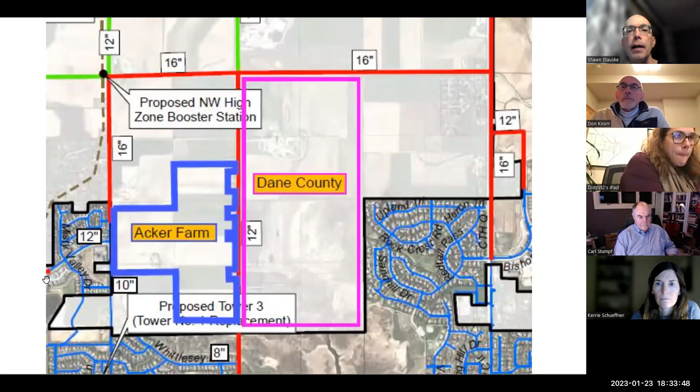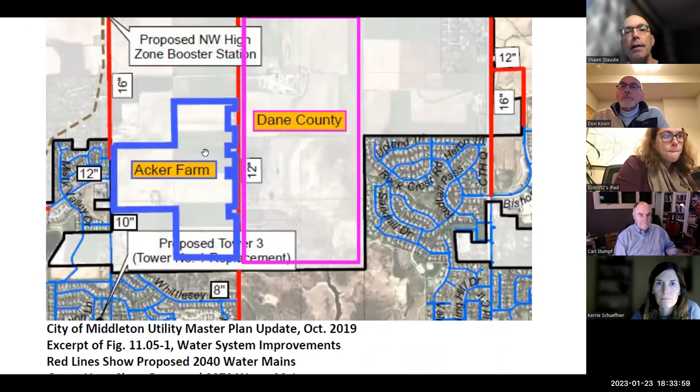So all the recommendations in the study, let me spin down and highlight it in the diagram. This is virtually the same diagram we had last time of the water main. This would be a 12-inch pipe that comes up along, not right along the roadway, but internal to the development and then back out to the roadway. So that's consistent with the utility master plan.

And then for the sanitary sewer, I realized there were a lot of numbers, that's why I just made this graphic instead. There's sort of a drainage break, if you will - southeast of this line that I'm tracing with my hand would drain down to the pumping station and go into the Pheasant Branch interceptor. Things north and west of this line would drain through Misty Valley and get into the Pheasant Branch interceptor that way. This little bit of an elbow of existing pipe is the one that has somewhat limited capacity.

So it's collecting sort of the north part of Misty Valley. It'll be collecting the lion's share of Acker Farm or Redtail Ridge, whatever it ends up getting called, and then a little bit of this future area to the north up toward Balzer Road. But to collect the rest of that, the pipe that'll be built through Acker Farm has capacity. It's just this piece of existing pipe that was laid flatter than would have capacity for that, so that would have to either be relayed or upsized.

One other thing the developer's looking into, and it's really a concept at this point, is could the pump station down here be eliminated if they could find a gravity route that goes right into the Pheasant Branch interceptor? The hard part is there's a bit of a creek that goes west to east right through here, and they have to get under that. It may not be possible to get under that and still have cover over the top of the pipe. So they're open to looking at it. I'd love for it to work. I'm not very hopeful.

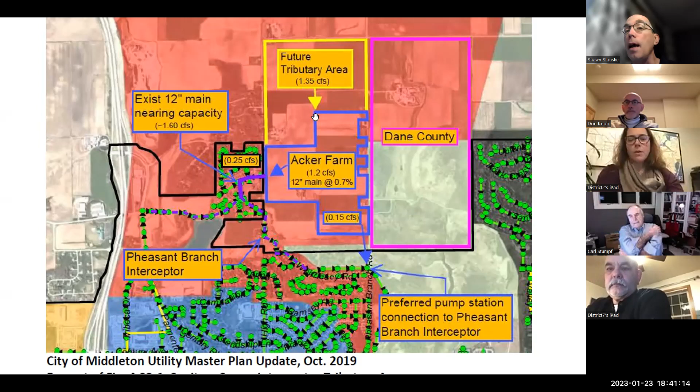All right, one last question - is it better to do that now before Acker goes in, or does it matter? Well, the harder part is, Acker has capacity in the existing. So there's not any great reason to make them do this now - we just need to make sure Acker doesn't do something that would screw up a future connection. That's why we wanted to make sure this is the right size at the right slope, so we don't have 1,000 feet of main that has to get relayed.

Say we're looking for a motion to recommend approval of this. We have a motion and a second already, Carl. We just need to finish discussion, and if the discussion is finished we can take a vote, but is the discussion finished, I guess that's my question. Excuse me, my internet connection's acting up tonight so I'm a little slow. We saw that, Carl. All right, with no further discussion, motion has been made and seconded.

All in favor of the motion, which is to approve this plan, please say aye. Aye. Opposed? Motion carries. Item number 3, plat plan.

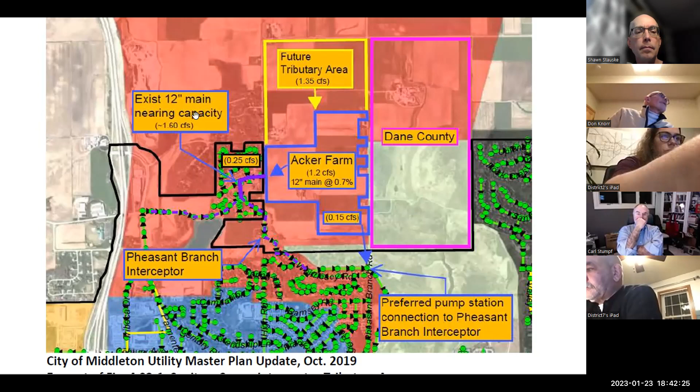So number 3 is the preliminary plat, and we've been looking at a couple iterations of that. Oftentimes these things just go to the Plan Commission. Since we have some roadways the committee's already looked at previously, and some of these utility issues, I had just gone through it, and granted there are quite a few markups on it, but the recommendation in a grand sense is for conditional referral to the Plan Commission, with some conditions.

So let me just head over to the plat. I put a bunch of comment boxes in. I don't think many of them are terribly substantive, other than in these multifamily lots. The center one is right now planned without frontage, so that's something we're going to need to talk with them

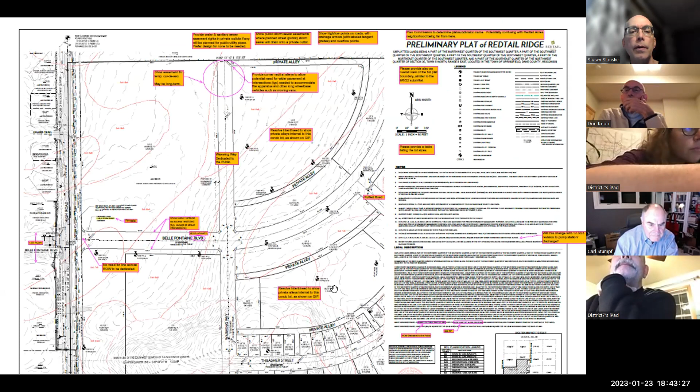sooner than later. And this road that's stubbed out for a potential connection into lands to the north for future development, we're asking, as is typical, for an easement for a temporary cul-de-sac. The rest of it, I think, is relatively insubstantial.

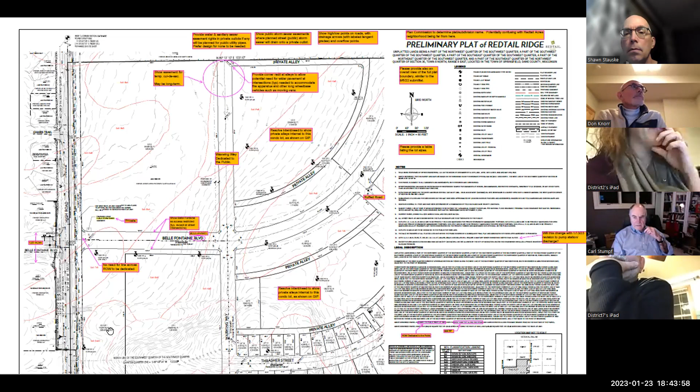One of the things you might want to do is have them fix the key plan. Every one of these drawings shows the same area on the key plan, which is not true.

Is it this plan? Are you saying that it's inaccurate on each plan? No, it's the same, because it shows the same area on each plan. If you look at each one of these drawings, it shows the same area on the key plan, which is not true. Oh, I see what you're talking about. Okay, I didn't even really look at that. I just was using that as my own reference. I was trying to follow this. It was impossible.

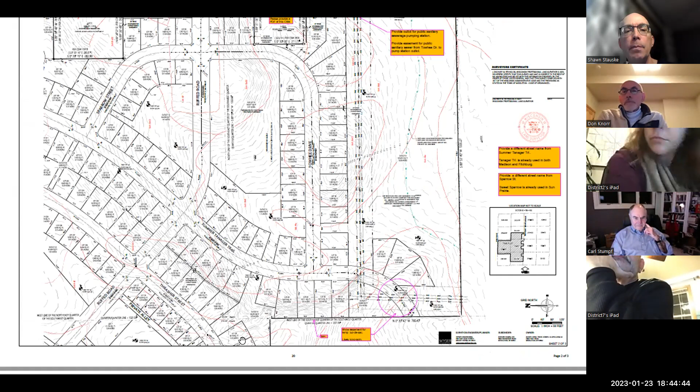Yeah, the part I found a little more frustrating is there are no match lines. So parts are duplicated, but parts just have gaps. Yeah, but I'll make a note of that. You have to add match lines in here too, Shawn? That would be good.

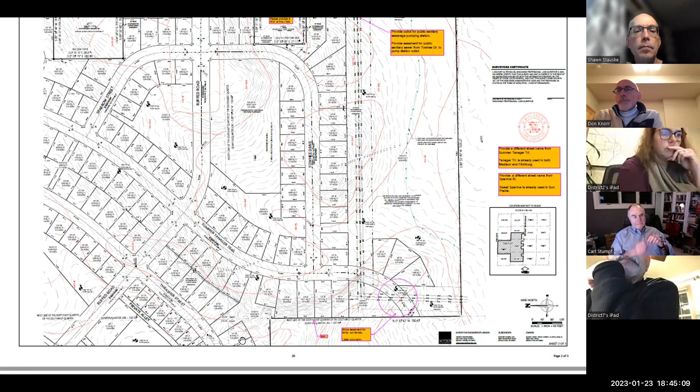Okay. So you need a motion from us to approve, to send to Plan Commission with these comments, or approve with these comments to send to Plan Commission. Oops, every now and then I get to resize things.

So I drafted, and I'm certainly open to additions or changes, but just drafted a recommendation to get it back to the Plan Commission for conditional approval with at least these conditions. You or they may know of more.

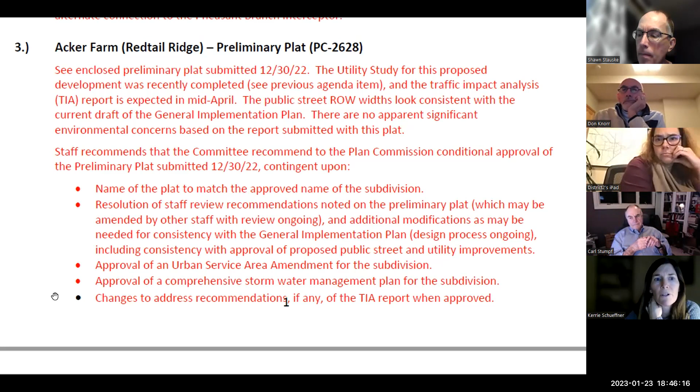All right, do we have a motion that states such? I guess the motion would be to include these items in our motion to approve, correct? Well, ours is to recommend it to the Plan Commission for their conditional approval. They're the ultimate approval, okay. I'll go ahead and make that motion that we recommend to the Plan Commission conditional approval of the preliminary plat contingent upon the items listed here in the agenda or in the memo, either way, I guess.

Okay, any corrections or additions to those? We have a motion from Kerrie. We need a second. This is Kendra, I'll second. Any further discussion? Hearing none, all in favor signify by saying aye. Aye. Aye. All opposed? Motion carries.

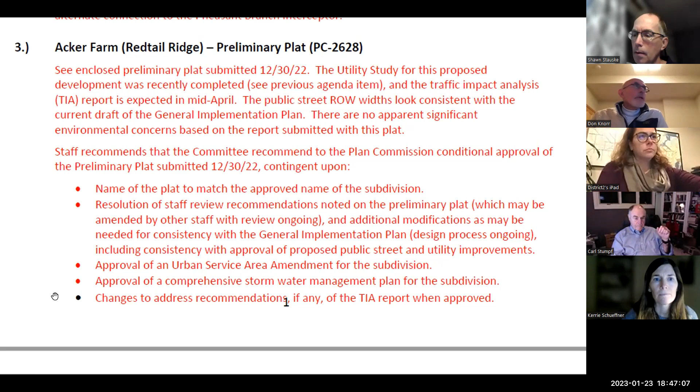There, finally. So the Bruce Company redevelopment has a couple things going on. One, and I've split it into two pieces here, ideally, just, I hope it's more straightforward this way. One is for the TIA addendum, which we had looked at last time but did not take action on. And the other is for discussion of site access apart from that analysis.

Okay, Shawn, if we go ahead and approve the TIA addendum, and then there are some changes, do we have to have a new TIA, or I guess how does that work? Like, you know, agenda number 5, if there are some changes, how does that impact things?

Right, well, so that's a really good question. A TIA is something we need because of the nature of redevelopment. We want to understand where traffic's going, where conflict points are, looking far into the future. It has recommendations for the city's guidance. The city can take action or reach conclusions different than the TIA, but this is just a snapshot with technical analysis of input. So they looked at 4 different driveway connections with varying degrees of mobility and made some recommendations. If the committee and or Plan Commission and or Common Council wants to go beyond that or look at something different and reach a conclusion or approval for site development different than the TIA would recommend, they certainly can. This is just providing technical analysis and input on some fixed conditions.

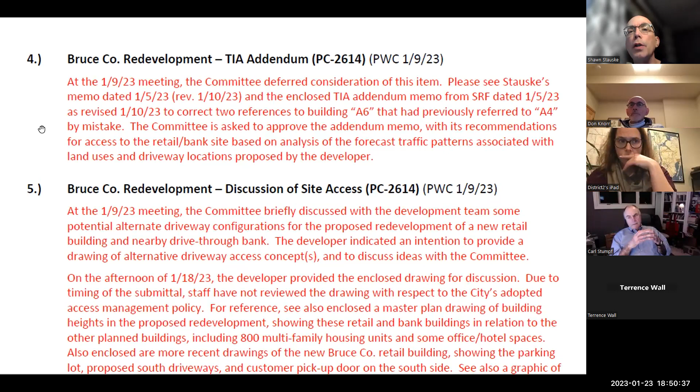Does the motion include the memorandum? Well, the motion is the memorandum, basically. Okay, so we already previously approved the full-blown TIA. Jake Buns, on behalf of the developer, requested that we study different access configurations just for the retail site, not the overall development, but just the retail site.

Okay, so it does include the memorandum, the SRF memorandum of whatever that date is. Yes, and that memorandum is fixed just to those 4 driveways. And if the city comes up with something else different, it doesn't include that.

My thoughts behind making this motion, setting legal aside, are that my understanding is that we go ahead and approve the memorandum as is, given the design as it was. Then in agenda number 5, we could discuss other potential options, but those weren't on the table when the TIA addendum memo was analyzing those options. So it was analyzing those 4 driveway options.

Right. Okay. Again, we have a motion, but no second at this point, on item number 4. Correct, so then the motion would die for lack of second. Correct, unless we get a second here in the next minute or two.

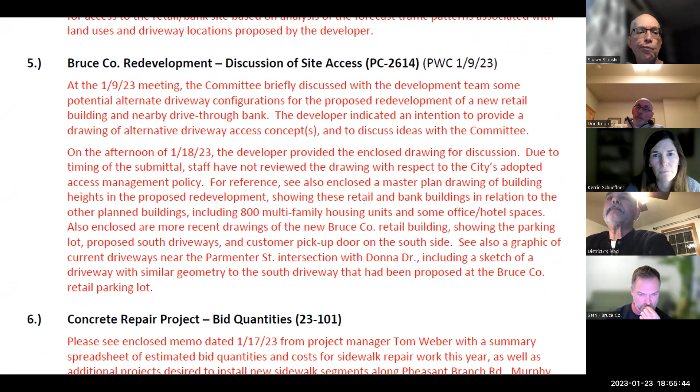So Shawn, explain to us, I looked at the plans and saw them, and it looks like we would have to accept a variance to the city's design concepts. Is that correct?

Well, the city has an access management policy that we've adopted, but it's policy, right? It's intended to give everybody the same guidance for the same situations about access. And that's a lot of what SRF has been looking at, and it's frankly based on practical experience with things. So they made recommendations that are just technical, saying we would recommend against this.

I know the committee looked last time and the developer provided a drawing with this southerly driveway being more of an S-curve than just coming straight out. Previously it was in the mid 50-foot range from Parmenter Street curb over to the driveway, and then a little further from this next driveway. Now it's dimensioned well to the center, so 80 feet from the edge of driveway to the stop bar, when it had been much closer than that. That puts this now in the ballpark of 60 or 65 feet away to the next driveway.

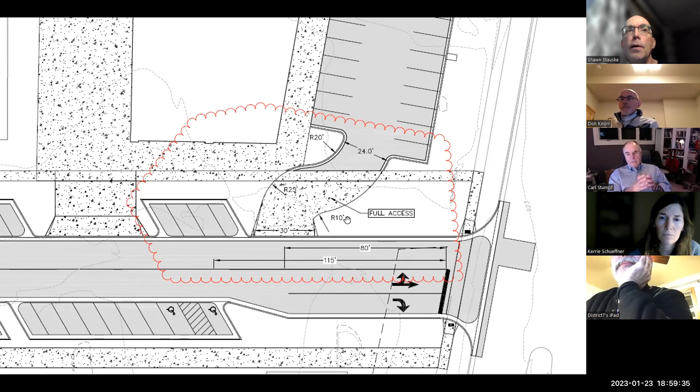Well, I think the city, I don't know where council's definition of policy comes from, Scott. That's my question. I'm open to that different interpretation. I just think in broad brush, it's different than an ordinance. It's not something that the council specifically has to override. They've adopted something and given it to staff and said, follow this, which is what we intend to do.

But the council can reach a different conclusion on a site-by-site basis for different reasoning, and that's okay with me as a staff perspective. I just think, from what I'm looking at, plan or policy aside, that the desirable clearance from the intersection isn't going to be achieved here. I think there's a lot of other stuff going on.

If we're going to look at angle parking, and then we're going to look at a truck dock, and we're going to look at folks backing into a pickup area, I mean conceivably somebody would leave this parking lot and drive 60 feet and then back up. And there's, from my perspective, a lot going on.

Yeah, I agree with that, Shawn. It does seem like with the parking, ideally that driveway would be set back further. But could you put your cursor where the policy says, like there, right? Right, okay.

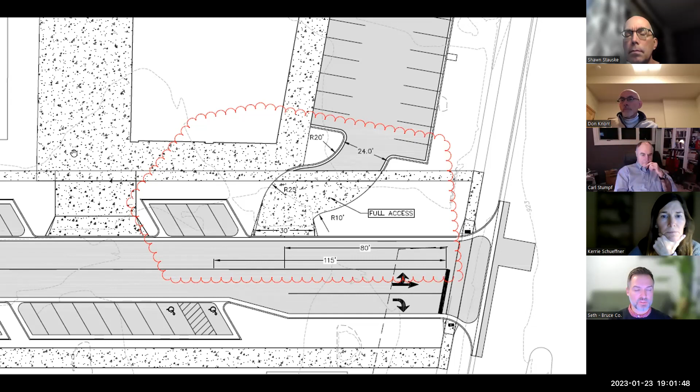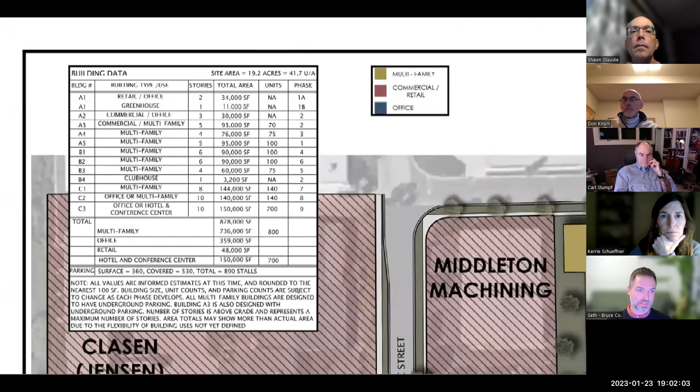Keep in mind Laura Lane as a major corridor of the development and the direction of most traffic to get to the Beltline, to get in and out. So the only traffic that most likely would be traveling on this road from the development would be going to downtown Middleton or downtown Madison. Most of it will be going Laura and out.

And also keep in mind, these two driveways are existing, though slightly different. Have we opened it up for public comment yet? I just wanted to, before we get off track. It's up to the chair.

So Shawn, one other question here. Let's say we approve it - we essentially are approving a variance then to our policy. If we do not approve it, the developer still has the opportunity to go back to Plan Commission and Council for approval, is that correct? To override us? Or at least conceivably they could provide different input to the council. Yeah, all right.

I agree with you, Shawn, with the apartment buildings. I'm trying to understand the flow, because we want to make sure we're designing something where people can easily get in and out. I understand where the Bruce Company is coming from, but we have to look at the bigger, larger picture of the apartment buildings in the back too. So this is a good view, thank you for showing this.

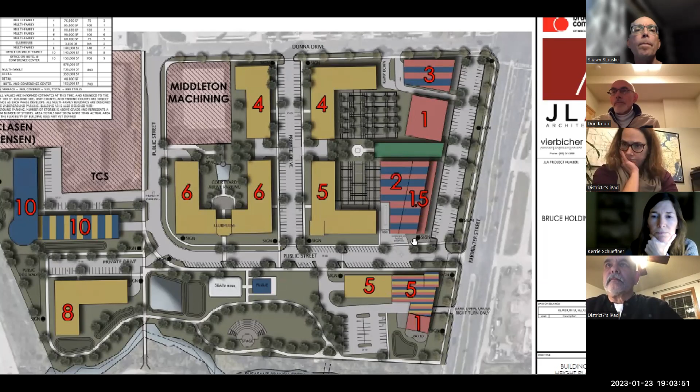Seth, do you want to answer that? Those parking stalls are not only for the city, but also additional for the park across the street, and there's an entrance way to our office and design studio, which doesn't get much traffic - very minimal, people dropping off a check or coming up for an appointment for landscape design. Majority of the time we're going to the homeowners, but it is an entrance way upstairs for customers. The rest would be parking for employees, but it's the rarity of those customers that would park there.

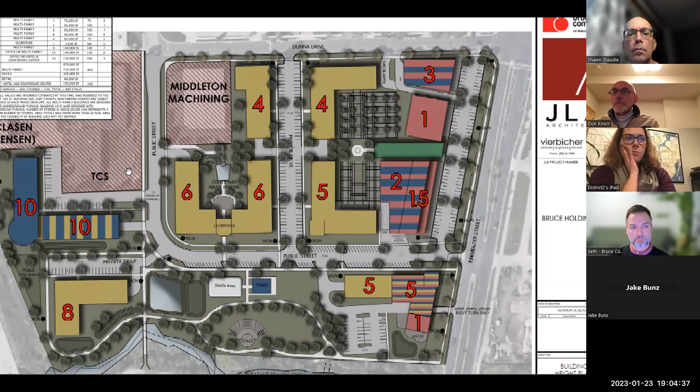Okay, because the elevation on page 5 doesn't really show an entrance on that side. So I was wondering, maybe on the stone part of the building. Because it seems to me those parking spots seem sort of superfluous - I'm not a parking person, but it seems to me you could gain space from those small ones accessed on the street.

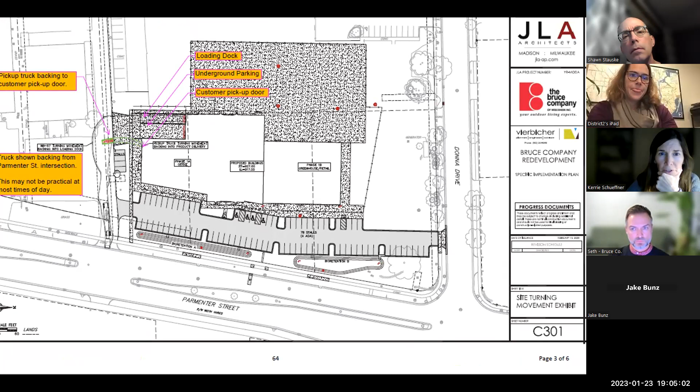Yeah, okay. Could the driveway move a little bit further back if those weren't there? I don't know, that's a pretty tight S curve already, as shown. That was my other thought too. I also think drivers may tend to try to straighten that out, but then they're going to find themselves heading into opposing traffic. Yeah.

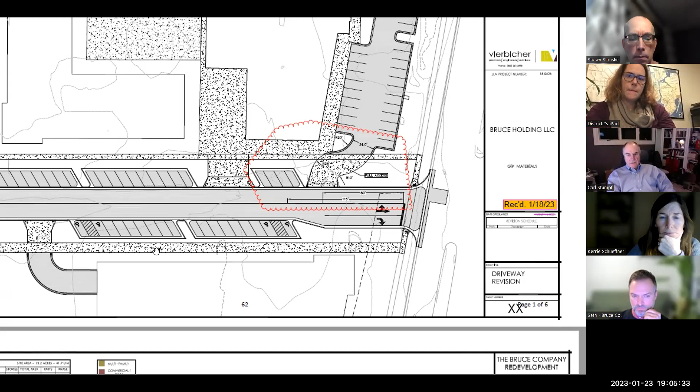How is the semi going to back into building number 2? Is that shown on the previous drawing you had up, Sharon John? I don't remember which is building 2 - go back. But Building 2 is right there, it's the South Bruce Company commercial building. Is it this pickup area?

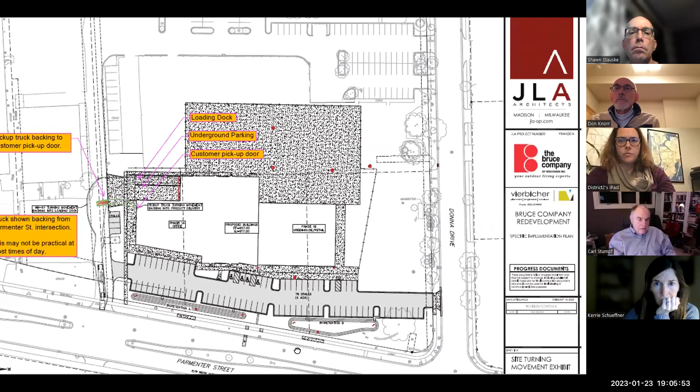No, not this one, the one you just had up before this. It's number 63 of 86. Okay, you see number 2 there? We're number 1.5, adjacent to number 2. Is that notch a semi that backs up in there? Right, so that would be the truck dock. This is number 2 and this is 1.5, but it's not coming through very well. Okay well, whatever - is that a semi that backs into there? Let me zoom in a bit.

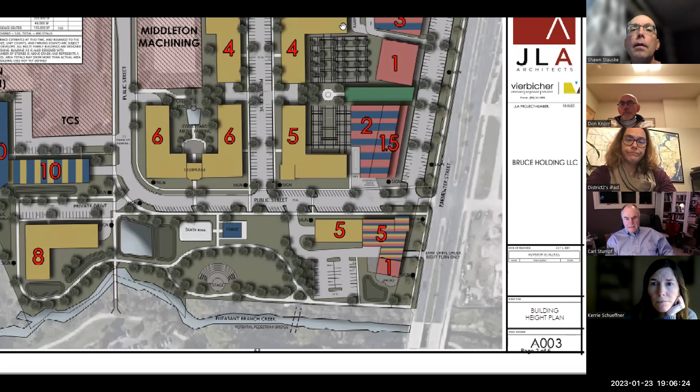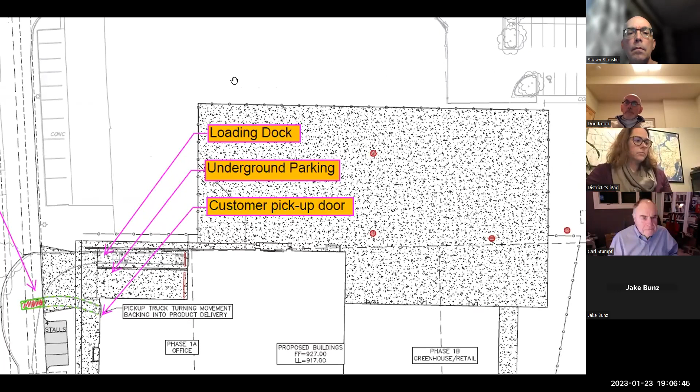I can comment on that, Shawn. So yes, it is a loading dock, and in talking with Seth, they need that just for inventory for their garden district. Vierbicher has done a turning radius analysis on whether the truck is narrow enough to back into the loading dock.

But Seth, you could talk to how many times you get a truck in the loading dock - it's a necessary part of your business, but I don't think it happens all too often. It's not a giant warehouse getting 5, 6, 10, 20 deliveries of 18-wheelers a day. It looks like the same problem that Bagels Forever has with John Fladd's thing on University, right off of University Avenue, frankly.

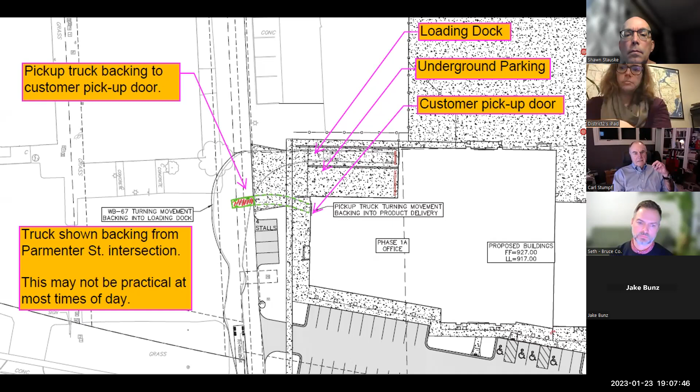I don't know, the density of this site is just way too much, frankly. I think that to come in with a development plan that doesn't meet the standards of the city is not acceptable - certainly not acceptable to me.

Carl, just so you can understand a little more of our process. Way back when we started working on the general development plan with the city, got it approved, and got the SIP for this building approved, the layout of this building, the driveways, the parking lot, and the development site as a whole was creating an urban environment where we kept a sea of parking off of this site. We minimized the parking and left the driveways where they've been for the Bruce Company for 50 plus years. So that's some history on how it was designed and why, but that doesn't meet the needs of the city because the standards from 50 years ago are different from when this was originally built.

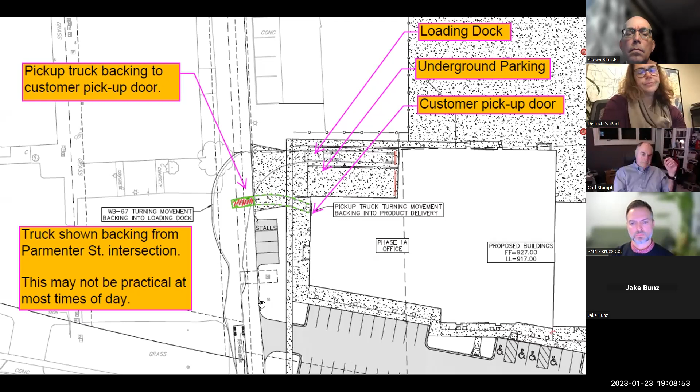Yeah, and that's exactly why we're proposing this 80-foot distance, if Shawn wants to show that, away from that Parmenter Street stop bar. Because we can make it work within this site. I don't think it's ideal for the Bruce Company, but it's something our engineers took a look at and they can make that curve work. At the least, if you guys were to approve a variance that we could have our driveway 80 feet away from the stop bar, we could go back and take another look, see if we can make it function even better. I think this is a starting point for us, but we're really looking for this variance.

So obviously we can't make that turn work at 115 feet like the city's access management policy, but as shown, we can make it work at 80. So if we get some direction from you guys that you're okay with us pursuing this 80-foot distance from the stop bar, we'll go back, rework it, and try our best to make it fit the site as best we can.

Well, so that's one issue. And to wrap up, I, for one, don't believe that we necessarily have the authority to provide an exception to a standard that the council has approved, frankly.

Well, last meeting that was the recommendation, that there might be a compromise to the alternative, and that's why we went back and actually adjusted this accordingly. Because my other alternative—well, I remember the discussion at the last meeting was to get it within the standards, and you maybe have to cut the end of the building off to do that. You're telling me that we didn't discuss last week any type of compromise from the 115?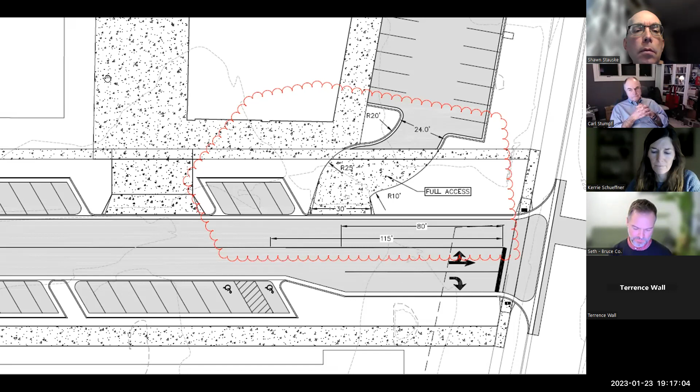Let me, I always have some trouble with that, but let me try. Yeah, I know, me too. Just click it to that. Turn it into a free for all. Maybe. Hold on one second, I'm trying to get this to work.

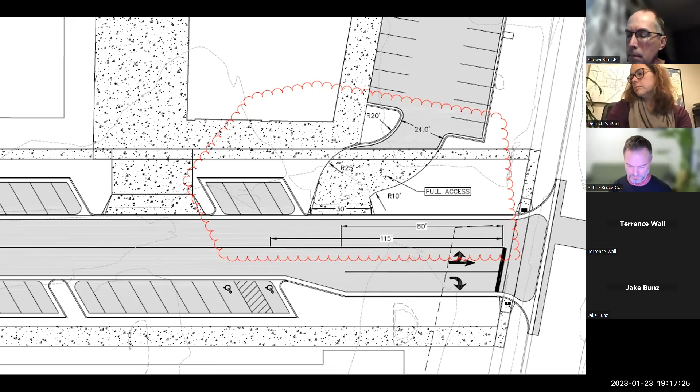You guys see this? Yep. So it's kind of messy. I just drew this up and I've not gotten any feedback from Seth on it, so just caution there.

What if the driveway was one way in, going in, so there's nothing coming out, and the outbound traffic turned to the west? There was a parallel lane to the pickup window for customers, so they parallel park there. And then that's one way going outbound, much further away from the intersection. The wide driveway you currently see is going to be reduced because we're going to get rid of the ramp to the underground parking.

The underground parking—so then you'd have, I think, the problem solved. We would get rid of those 4 parking spaces right on the street there. That'd be grass. I don't know, it's just a thought.

So we would be past the 115 then in your little diagram. You'd get rid of those four spots, yes, provided the past engineer could make this work. Yes. And then one way in and one way out, and you'd come out farther down past the 115. Okay, I see what you're saying.

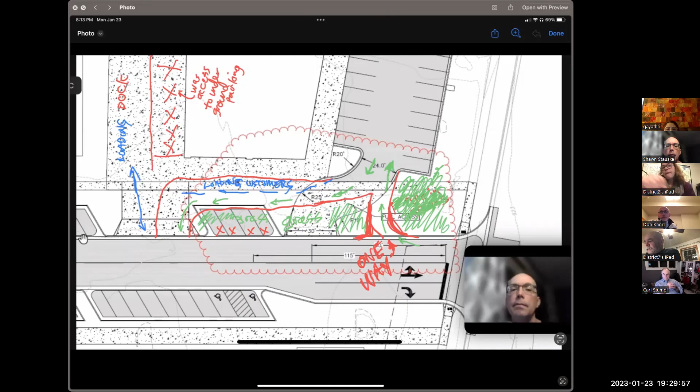No, we passed a motion. Yeah, never mind.

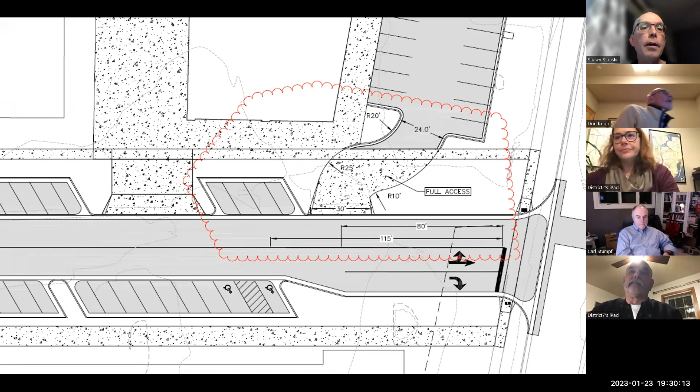All right, let's move on. So we were up to the concrete repair project. Let me just get things situated here a bit for you again.

So this comes down to creating a bid package, and Tom Weber, who runs that program for us, has preliminarily identified work within our typical 1/8 of the city area. In the meantime, there's been some interest in infill sidewalk, partly along Murphy Drive, south of Costco, out near Eagle, where there's going to be a new bus stop come June. And then a separate infill of sidewalk up along Forsythia Drive near Kiva Sports, which is planning to build sidewalk along their frontage, but it won't be connected to the rest of Forsythia, but for filling in some other sidewalk.

Those would be assessable, but we'd still have to front some money from someplace, and we haven't identified a funding source for that yet. But just to get things rolling, Tom was thinking we could bid those as alternate work groups and then work on identifying funding, or look at the pricing and see if the council supports that work at those prices, getting that done too right away. So we don't want to try to bid it just as standalone work right now because we don't have any way to pay for it.

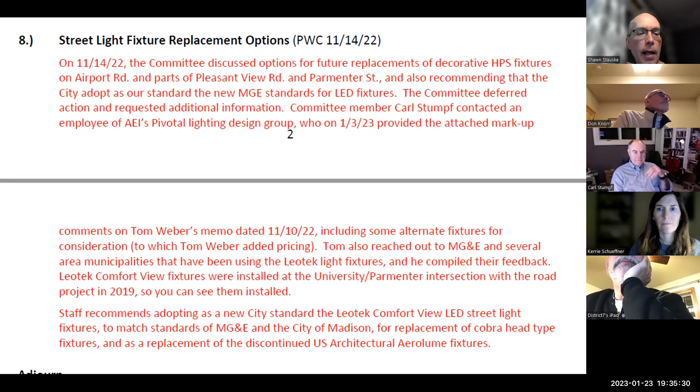Yeah, Carl got us a bunch of information from somebody that he knows, and I don't want to get that somebody in trouble by broadcasting it on the internet, but they gave us some good ideas, and that was included in the packet. Tom Weber did virtually all the follow-up because my time is just spoken for, unfortunately.

But, you know, I think the one concern is maybe the fixture that MG&E and Madison have standardized is something on the lower end, certainly in price, and the fear was maybe in quality as well. We don't have a long track record of the folks we got input from. I don't think any of them have a long track record because this is just kind of all new stuff.

Folks we did hear from seemed really satisfied with it. They said it's easy to work on. It adapts to house side light cutoff shields really well. It's obviously, when it's standard, it's a little easier to get.

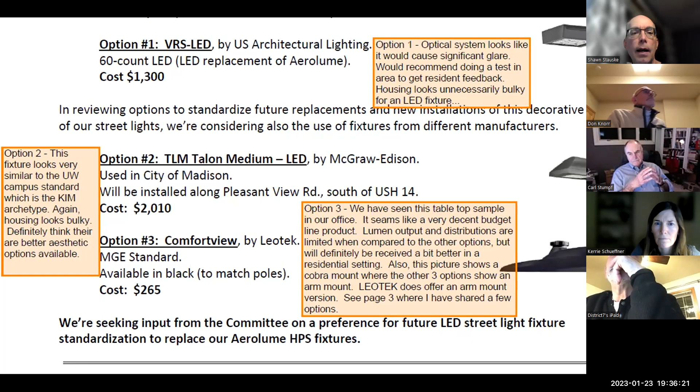I didn't realize until I was walking by that University and Parmenter already has had these things for several years, because I just don't spend enough time looking at light bulbs. But I checked with Tom, and he said there's more than just one of them. Yeah, I think we did that whole intersection at the same time.

So, I think the recommendation was this one with the Cobra mount. And was there a picture of that further down?

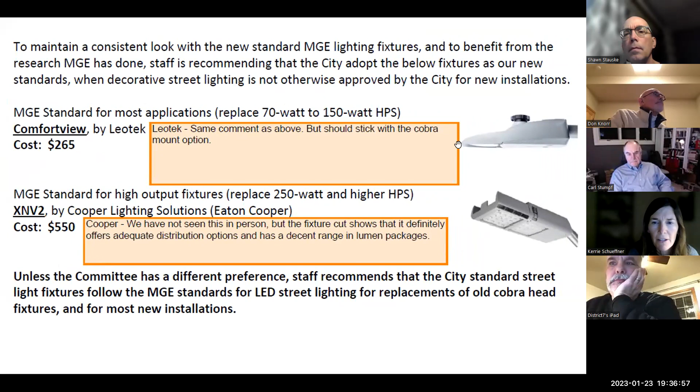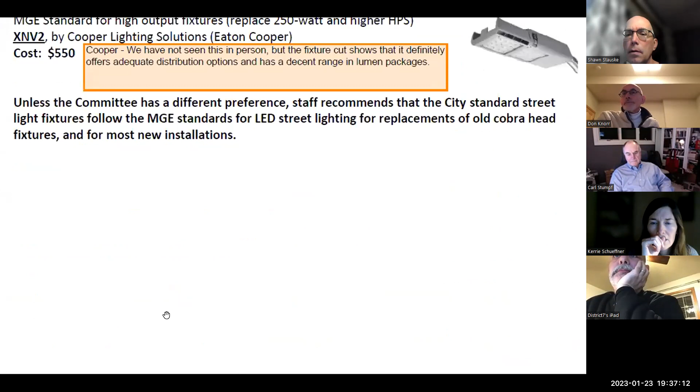There's a Cobra up higher on page 2. Yeah, 2 of 3. But that's this one, not that one. There was an actual Cobra, the type with the light. Oh, this - that's what they used to look like.

Yeah, those are the ugliest things in the world for a modern city. Do you know how many phone calls I've gotten about how ugly our streetlights are? Probably none, but yeah. People tell me if they're working or not working.

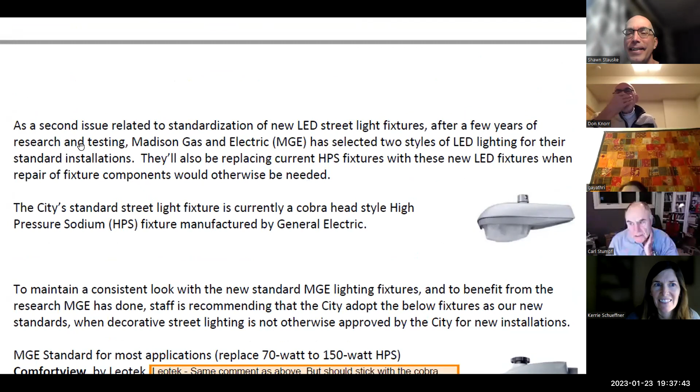Yeah, so - oh sorry Carl, go back to page 84 of 86. Okay.

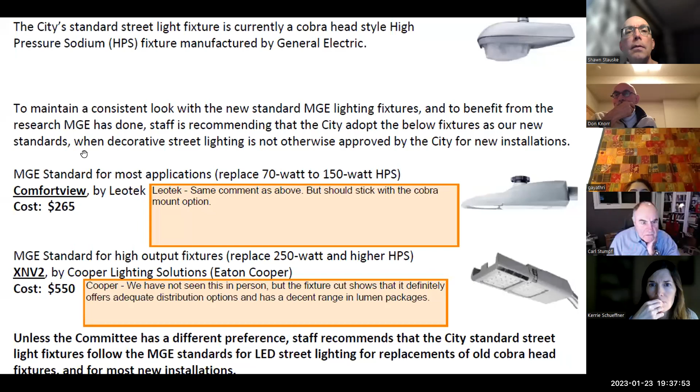I think the Cobra mount is a close coupled mount versus an arm mount. I'm fairly sure that's what it is. I myself wasn't certain, but normally we're just trying to replace these things, so whatever the mount is, that's what we want to match.

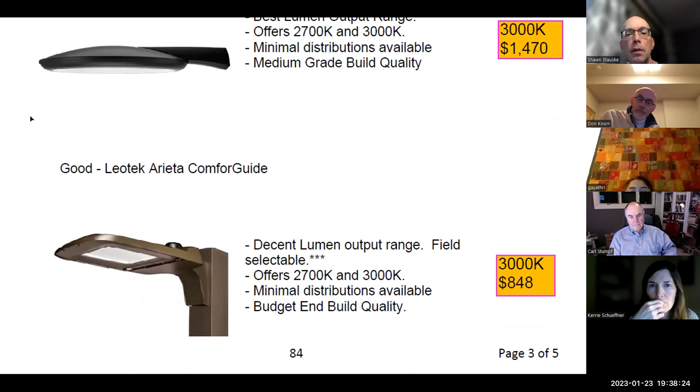Yeah, most of our fixtures that I drive around the city are arm mounted. There's a big long arm on them. They're not close coupled like this. Right, most of them.

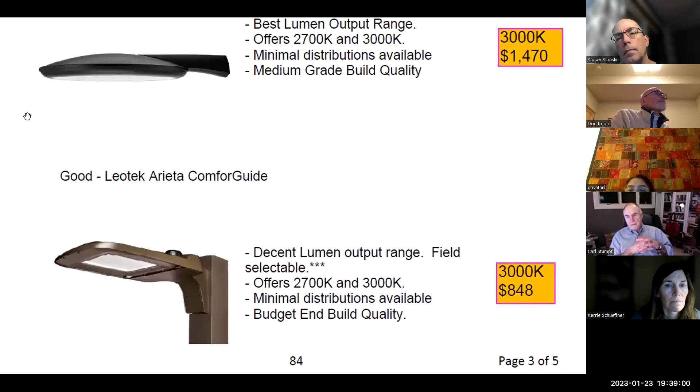The concern I had with that $265 option was the ability to get it down into a color range that's probably more acceptable. I don't know, but that Comfortview fixture will come in three different light sources. You can get a 4,000 Kelvin, a 3,000 Kelvin, and a 2,700 Kelvin.

The other thing I thought was interesting about that option tree that Tom was talking about is that there's a really wide range of field adjustability in terms of brightness, or for output. It goes all the way from about 2,500 lumens to about 7,000 lumens as a field adjustable number - which is what the data tells me about the fixture.

And Carl, which one is that you were saying - this one, the one that says best? Which one were you referring to? The $265 option 3 that Tom presented - that one there, it's the one that MG&E put in as a standard. And I guess the biggest recommendation comes from Wauwatosa, who seem to have had these things for quite a while.

They've been installing them since 2009. The only thing I get is this budget level fixture - I get concerned about the quality of the fixture, but it seems to have been performing pretty darn well. So I think I agreed last time we talked about this, that I can't see a reason for not doing the $265.

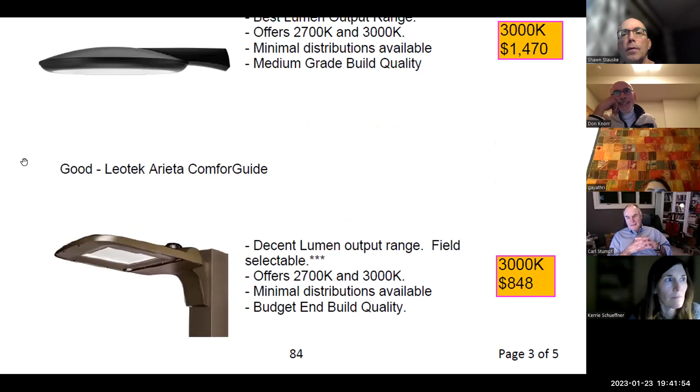Other than it's high pressure sodium - that'd be my only drawback. Wait, what's high pressure sodium, the $265 fixture that Carl's referring to? No, that one, this is LED. Oh, that is LED? It is.

Yep, standard for most applications, replaces 70 watt to 150 watt HPS. So they put in a 48 watt that replaces like 100 watt. But when they're talking about replacing high pressure sodium, they're talking about the LED application. Oh okay, well then I'm all right with it, that's fine. It's just that MG&E goes to a totally different fixture when they're trying to replace a 250 watt high pressure sodium.

Sure, okay, and all the high levels. So then Shawn, I know last time we talked about like if there was decorative lighting and that goes out - if we come up with a standard, this wouldn't get replaced with it though, right? Can we have some kind of - like a decorative downtown street lamp - it would look really odd to all of a sudden have one of these there. So I just wanted to make sure that doesn't happen.

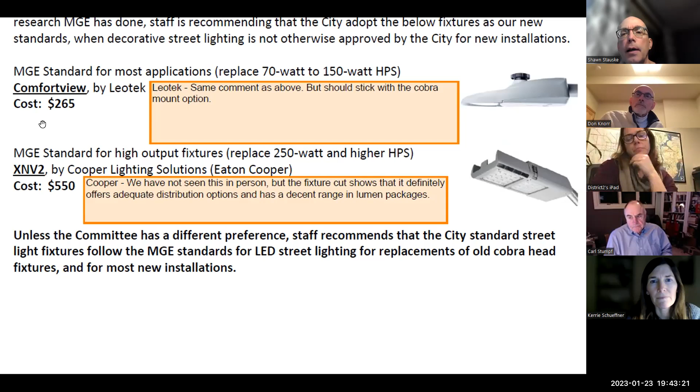Yeah, we have a lot of things going on, sort of unfortunately, and it would be nice to bring some of that back together. But the proposal here would be mostly to standardize what used to be the Cobra heads that we're all used to, and then also along Parmenter and Airport and Pleasant View, and they're black instead of silver.

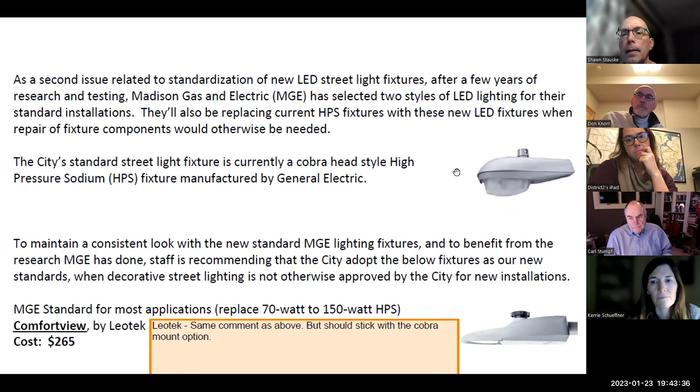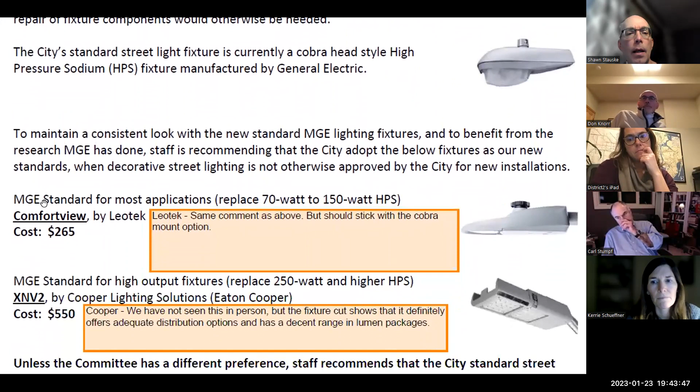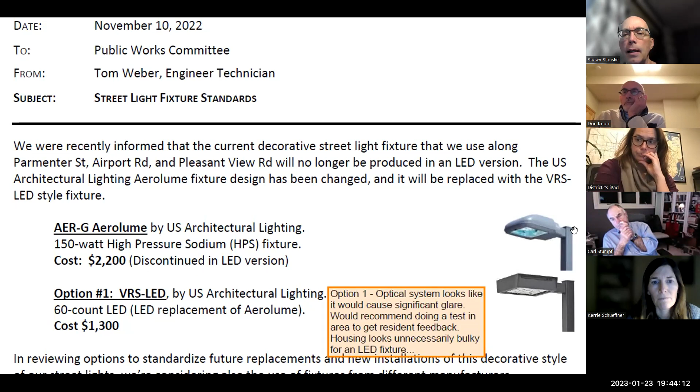What was disheartening to me is the way our rates work right now. Even a $500 fixture takes like 20 years to pay back, because the fixed cost has changed significantly on street lighting, so the variable cost of energy demand is really de-emphasized. At $265, that's not installed, that's in a cardboard box, so I was looking at, if it's $500 to put up a different light fixture, how long does that take? I think at a lower wattage we have better savings, so it's like 15 or 16 years. At the higher wattage, it's more like 20 years just to break even. So it's a pretty long period, it feels like.

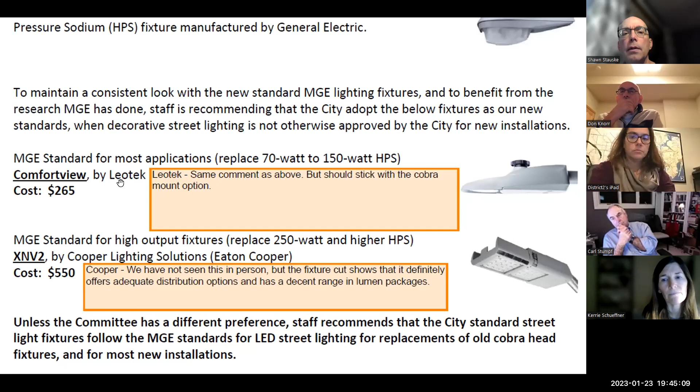And that's right, so we would have a mixture of like these white with the black. No, these come in black. Oh, and these do come in brown too. Okay, so that we can, I mean it would still be standard, they would just be a different color. Of light? The fixture housing. Oh, the fixture housing, okay. Yeah, so we can order these painted different ways.

The light is still set at like 3000 Kelvin, like Carl was talking about, so it's a little bit more warm instead of really cool. I think they're used to seeing, yes, that'll be good, won't be that much. You know, when we all used to see the metal halide lights and they were so white, and then we got high pressure sodium and they were so yellow, and everyone kind of freaked out, like what's going on. We're sort of going backwards now.

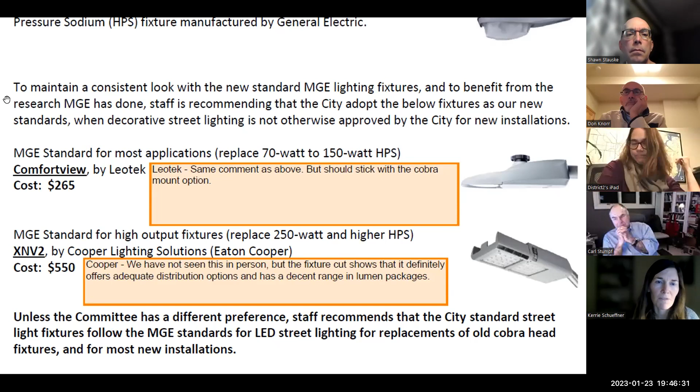Yeah, I guess I'm fine with the Comfort View. This cost of $265, if Carl's research or the person's research was helpful, I think - just because I had the same thing, and I was like, oh, it seems kind of cheap, why is that, warning flags kind of went off. But if it seems like other cities are using them, they're fine. And again, my thing is just to make sure that they don't get replaced everywhere, but if we can just replace the Cobra head lights, I'm fine with that.

That's our starting point, and we're just replacing as needed. We're not replacing to replace, we're replacing as needed. So, yeah, we don't have the money to just start replacing stuff. If you drive around the city, you will find a whole bunch of different types of light, there's no consistency, none.

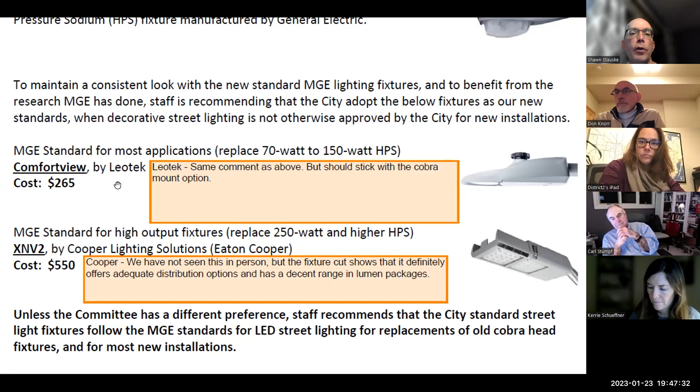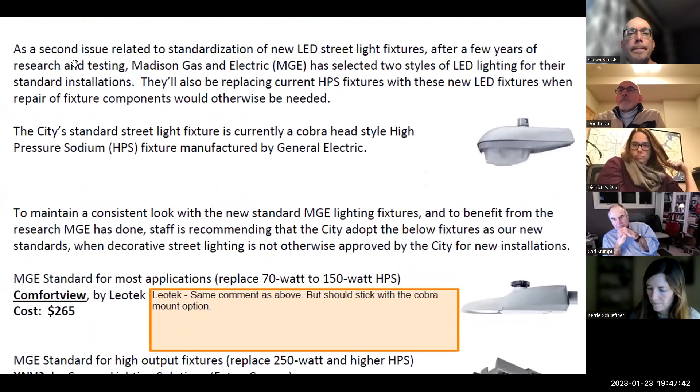No consistency. All right, so discussion around the 265. Does anyone have a motion at this point that we move ahead with that? I'm looking for language to make it. Well, right now, I think the recommendation is just to use this style, the Comfort View by Leotek, to replace, per standards of MG&E, Cobra heads and the Aerolumes that are no longer made. And as we get into other neighborhoods with very specialized lighting, we're just going to have to come up with something else.

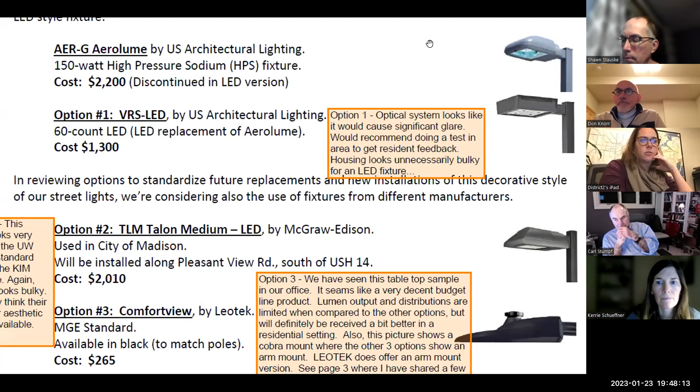All right, I will make a motion that the committee adopt as the new city standard, the Leotek Comfort View LED streetlight fixtures to match standards of MG&E and the city of Madison for replacement of Cobra head type fixtures and as a replacement of the discontinued US Architectural Aerolume fixtures. Wow, you did that well. I know, I can read. I'm proud.

All right, is there a second? I'll second it. Okay, and we have a second. Any further discussion? Hearing none, all in favor signify by saying aye. Aye, aye, aye. Opposed? None. Motion carries.

Was that it, Shawn? Are we done? That is the end of our agenda, yes. All right, we need a motion to adjourn. I will motion that we adjourn. Second? I'll second. All right, all in favor? Kerrie, yes, that was me. Okay, all in favor? Aye. Aye, aye. Opposed? No one ever opposes this motion.

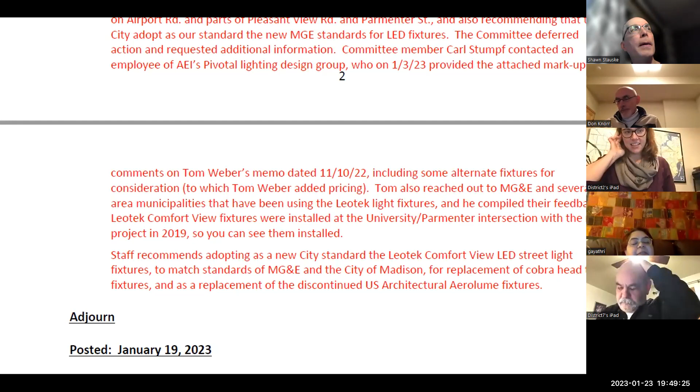Meeting is adjourned, and we will see, what is it, exactly 2 weeks, Shawn? Let me think about that. Is it? Huh, haven't thought about it.